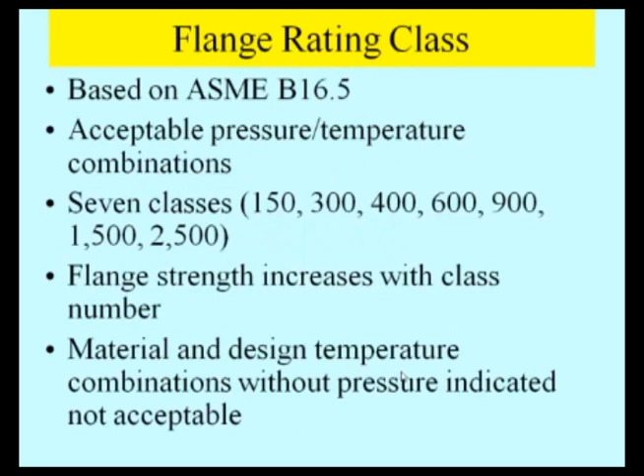Let's talk about pipe stress. What do you see for pipe stress? Well, occasionally you see the pipe break, but usually what you see is the effect of pipe loads on other things, like nozzles, on pumps - pump bearings wear out, pump couplings get misaligned and break. It's a huge maintenance source. If you push the equipment around from pipe expanding, you're going to have trouble. The fix is to put more absorbing leg in.

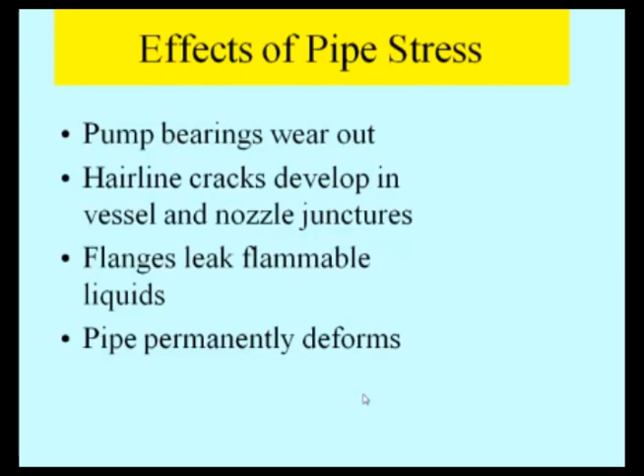Flanges can leak. You ever see the submarine films where they get depth charges? Boom, the depth charge goes off and all the flanges leak and everybody has to run around tightening them. Well, the reason they leak is because the pipe flexes and it compresses the gasket. And then it's leaking seawater and that guy has to go tighten it all up again. Or the pipe permanently deforms - you get creep. There's another condition even more dangerous called ratcheting, where it just keeps yielding and yielding and yielding with every thermal cycle. It never goes back to a stable deflection. It just keeps yielding and yielding, ratcheting.

The loads on these nozzles - there are standards that tell you what the loads are. You go to those codes, it says you have this kind of standard pump, here are the loads you get to tolerate, you can't go over these. So every designer that designs a pump says, my pump will take those standard loads, I'll always be able to. I'm not a pipe rack, but I can take at least those loads.

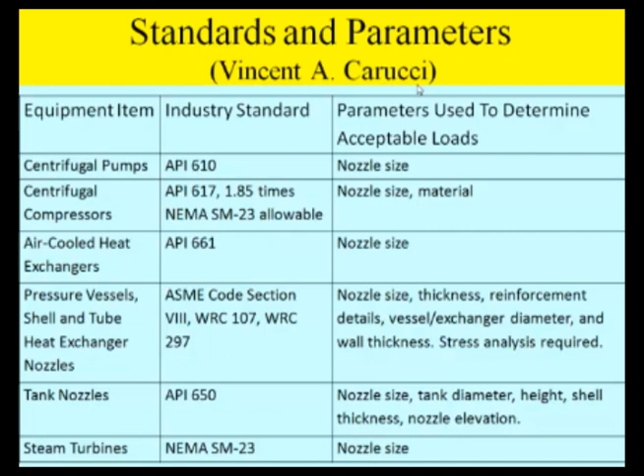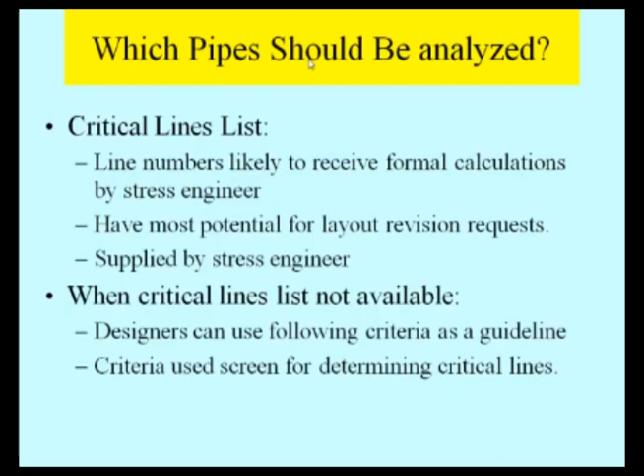How do we decide what pipes to analyze? We get a critical lines list. The stress guy sits down with the client and says, what's the baddest and the worstest? And okay, I figure out a critical lines list. And those lines are going to have to be checked. Usually he has a criterion: all the rotating equipment, all the lines with nasty stuff in them, hazardous stuff, lines over a certain temperature. He's got a criterion. When you don't have that, you have some tables.

Bausbacher and Hunt has some tables that you can look at. Bausbacher and Hunt and other guides usually have 3 standard situations to look at for pipe, for which there are closed solutions that give you a way to screen pipe. You don't have to be a stress engineer to find out if you're in trouble with these closed form solutions. And the 3 situations are: continuously supported in the rack, at least 2 pipe bents away from any exit. So it's continuously supported in the rack, bent after bent after bent after bent after bent, and it's just a big droop and droop and droop. So that's the best situation.

That is a table, span table. And then they're simply supported. It's getting ready to leave the rack. You're not at least 2 bents away from anything, and now you have to use less span, but there's a table for that.

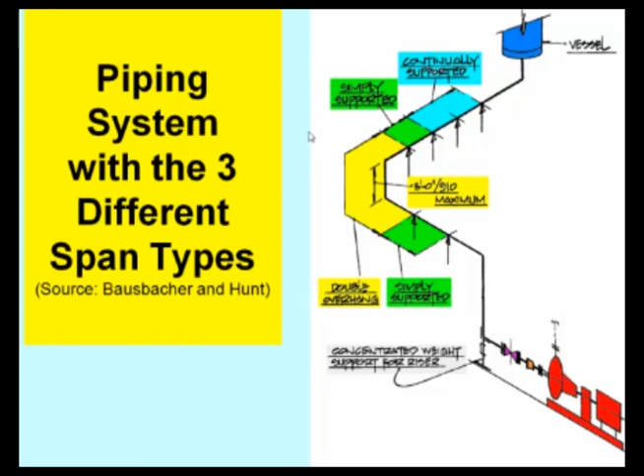Now, if you do that check and you don't like the answer, it doesn't look like it's going to make it, then you go call your friendly pipe stress engineer and say, you know, Houston, we may have a problem, okay?

Now, at pumps, remember, pumps are not pipe support, pumps are pumps. A typical situation is to use a kind of a diversion here in the discharge. There's a lot of discharge stuff. There's check valves, block valves, and so on, a lot of pipe. That can weigh 1,000 pounds. So going out the discharge nozzle of a pump, it's not uncommon to have a swing over to one side and have a dummy leg and an adjustable support to hold that pipe up.

So now let me just caution you, I've been in this spot where the actual flexion of the pipe, instead of being helped by that dummy leg, pivots on that dummy leg and makes it worse on the pump, not better. It actually pivots, it uses it as a pivot. So you actually press harder on the pump than you would have otherwise. So you got to be careful where you put this dummy leg. In most cases, this is a typical configuration you'll see to get out of trouble at the pump.

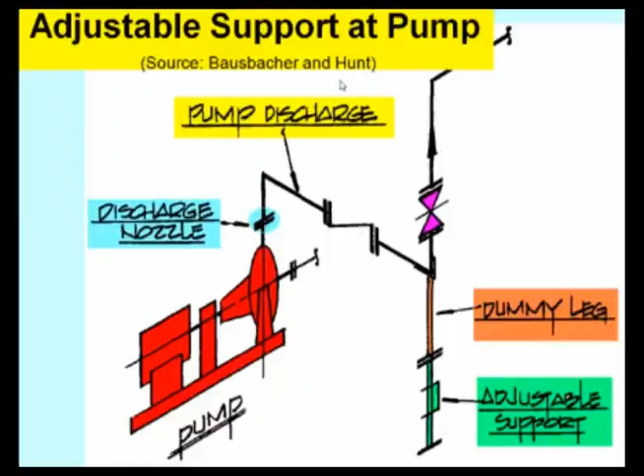There's another deflection. This deflection is at a control valve station. And it doesn't, this is exaggerated for illustration. Okay, this isn't what you'll actually see. I hope you won't. But just make note that when these valves are twisted too much, they don't work or they'll crack. Okay, or you have leaking flanges. So you don't want a lot of deflection here. You don't want to make it carry a lot of load. And you'll put anchors and guides to make that flex the way you want it.

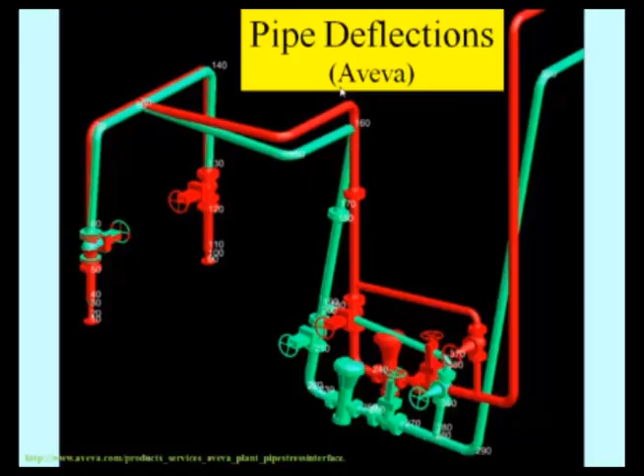What temperatures to use in pipe stress? Well, first of all, you want to see what the normal operating expand and contract situation is. And then you want to look at the worst case situation, the steam out day. I steam it out today. Okay, that's a higher temperature, or maybe I'm decoking it. Okay, that's high temperature stuff. So am I going to do that a couple times? Maybe that's the temperature I want to look at, not the normal operating temperatures.

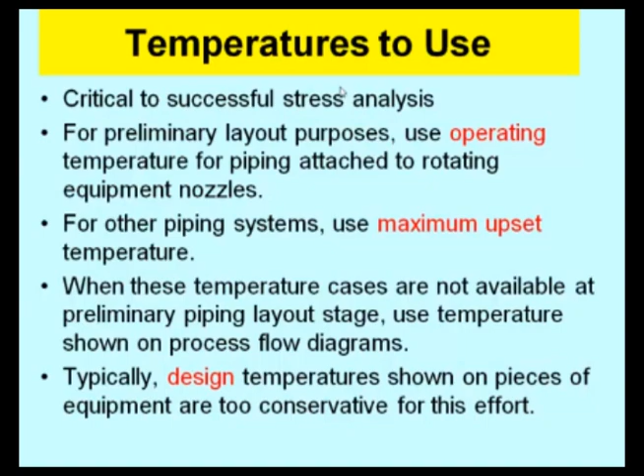I've had pipe stress situations where I've had 10, 20 different operating cases, and I have to check them all. This is on, that's off, they're both on, they're both off. One is turned off suddenly, one is turned on suddenly, that sort of stuff. I mean, you got to look at the worst case.

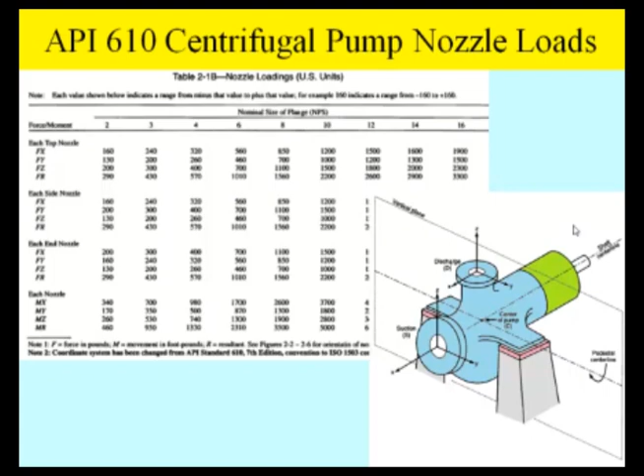And these loads, here's a API 610. There's API 610 will tell you what the nozzle loads are for their pumps. So if you get an API 610 pump, it's supposed to take these loads. So now you can design to API 610 and you know whatever pump you buy is safe.

How do I add flexibility to pipe? I put in a change of direction. The easiest one to put in is a loop, expansion loop. Just change direction in a little off center. That puts in a nice change of direction, and it's nice. You can calculate the size of the expansion loop from a graph. So that's easy to design.

But other things I can do is put in more bends, take a more roundabout route. Don't go direct, go in a roundabout way. Put in an expansion joint, which is usually not preferred, but sometimes you just don't have the room. So put in an expansion joint. There's a lot of ways to add changes of direction.

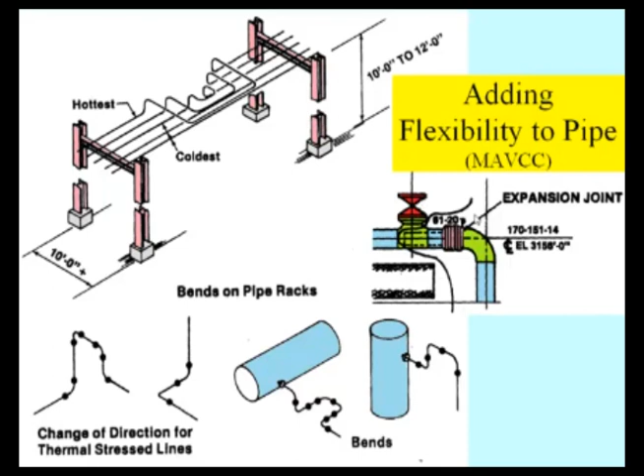Remember, pipe is a good fishing pole, but it's not a good pogo stick. So I put in guides and anchors to make sure that around the expansion loops, I get the movement direction I want. Make sure it's a pool shot and not a spaghetti wobble. Okay, make that pipe expand in just the directions you want and control it with guides and anchors.

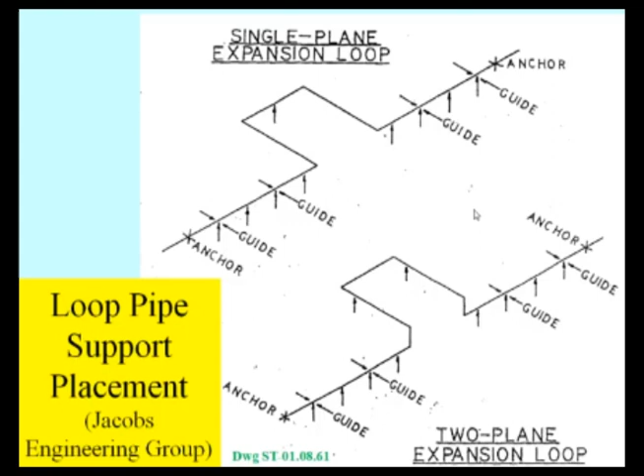Now, if we get to B31.3, the piping code, it's got some sections. There's a design section, a materials section, a fabrication section, erection, inspection, and testing. All those sections are invoked when they call for B31.3. But most people are interested in the design because at least they want to get the size of the pipe right.

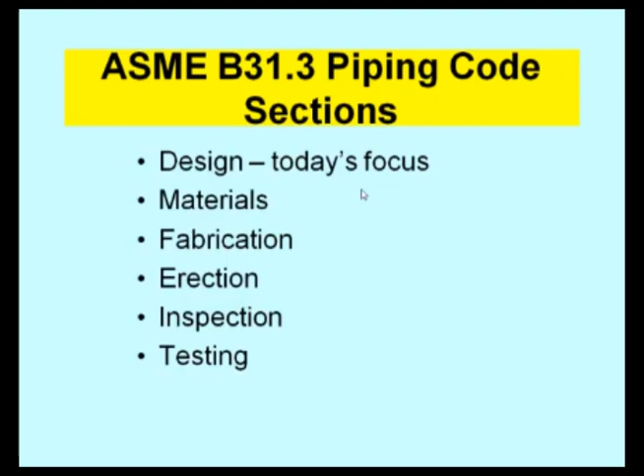By the way, where's B31.3 called out? It's called out in the material spec. The client says the governing code shall be B31.3. He implies by reference all these issues are satisfied by the designer and by the erector.

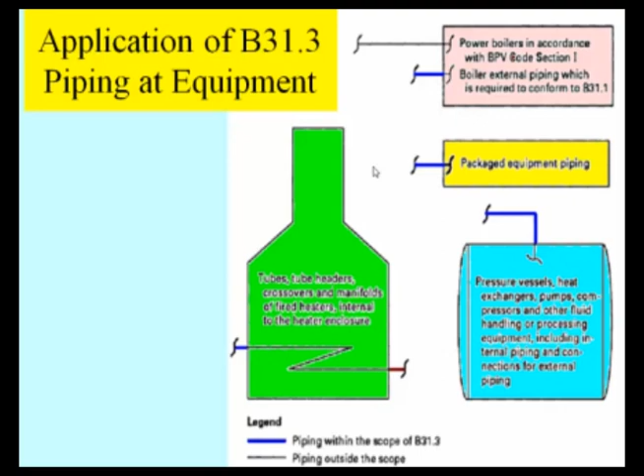Okay, now where do we apply it? Well, all the interconnections are B31.3, but inside these particular things, tubes and tube headers and furnaces and fired heaters, no, that's covered by another code. Pressure vessels and heat exchangers and pumps, that's covered by the manufacturer. Packaged equipment, that's covered by the equipment supplier. Boilers and boiler piping, that's covered by another pressure vessel code. So inside the equipment, it's covered by one standard. Outside, it's covered by B31.3.

And we look at sustained loads. That's the 'I'm always going to have it, it's never going away' load, like weight of the pipe, weight of the fluid. No matter what happens, you have to remember to hold up the pipe and keep the fluid inside. Okay, if it starts to bubble up or burst out, there's nothing you can do to stop it. It's just going to keep going. If it's too weak to keep that in, or too weak to hold up the pipe, it's just going to keep going and going until it breaks.

But the thermal expansion loads, they're different. Those are cyclic loads caused by thermal expansion. If I don't turn the plant on, I don't have those loads, so I can stop that at any time. And that has a tendency, because it's cyclic, the nice thing about steel is it'll yield slightly, and if it yields slightly, it'll relieve local stresses, and then it'll operate, in most cases, unless you get ratcheting, it'll operate in this yielded range of stresses. And those thermal expansion loads are cyclic loads, and that's the one we look at.

We base the code on 7,000 cycles. That's turning the plant on and shutting it off once a day, 365 days a year for 20 years. It's about 7,000 cycles. So most of the code fatigue is based on 7,000 cycles.

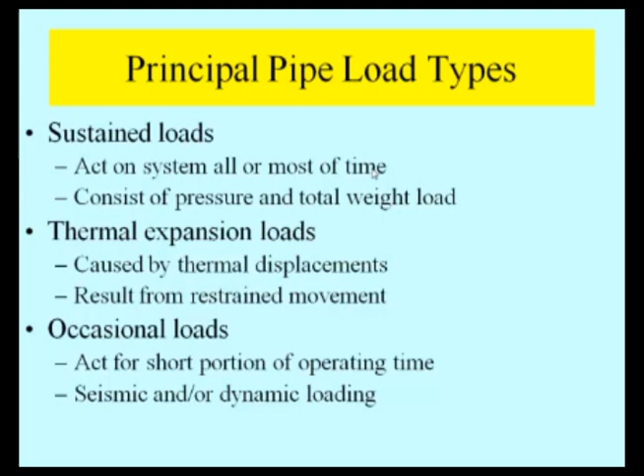And then we also look at occasional loads. That's the hurricane or cyclone or something that blows in. Earthquakes are also considered occasional loads. We tolerate a little bit extra stress for that — we just look at yielding failure. And then we always do an inspection after that to make sure nothing got really screwed up.

Okay, flexibility and stress intensification factors: different components like elbows, bends, T's, fabricated T's or mitered elbows have different flexibility factors. The way it's referenced, we try to reference it to equivalent straight pipe. So if you have an elbow or a bend, it's more flexible and more highly stressed than straight pipe would be of the same dimension, so we intensify the stress relative to straight pipe.

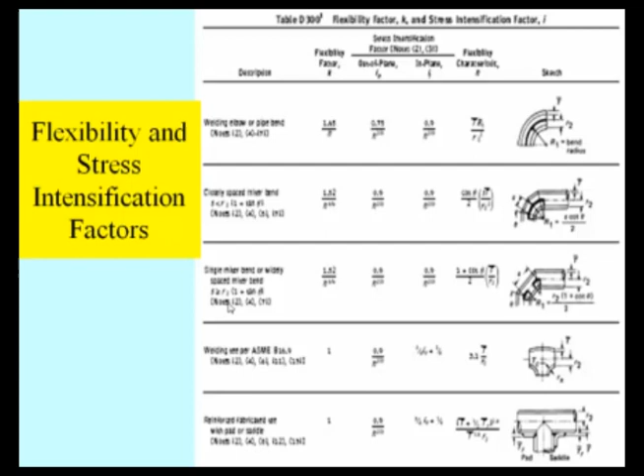Now the problem with elbows is that they turn into ovals when you bend them. When you have a straight pipe elbow, when it bends, it ovalates. You've seen it in rubber hoses and things like that, where it turns oval and finally it crimps. So it's more flexible but more stressed at the elbow. Same for T's, and you have stress intensification factors.